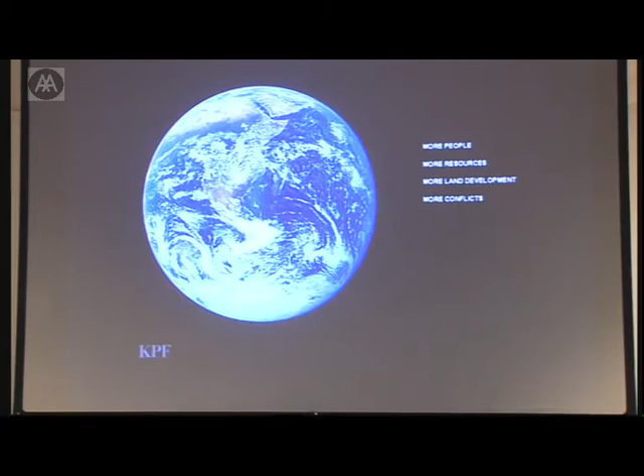Why tall buildings is maybe the first question, and that question is easily asked by people around the world, maybe more so in London. The world is getting more crowded, more resources are required, and every time you are struggling for land use, you have conflict. We have world population expansion, happening a lot more rapidly in developing countries than in Europe, but nevertheless happening here as well. More people are moving to the city, which means cities have to cope with growth of their own through either immigration or people migrating from rural areas into the city.

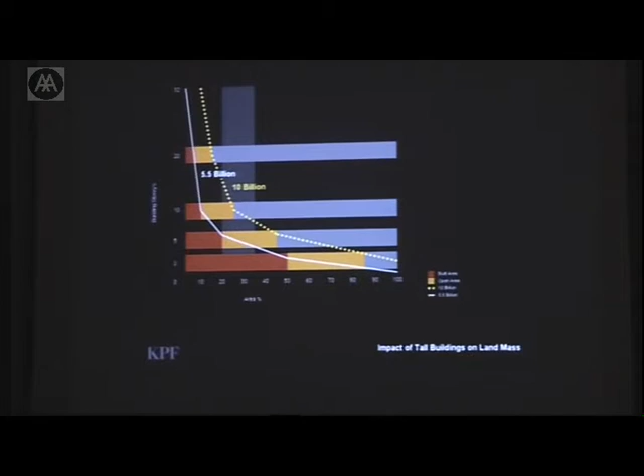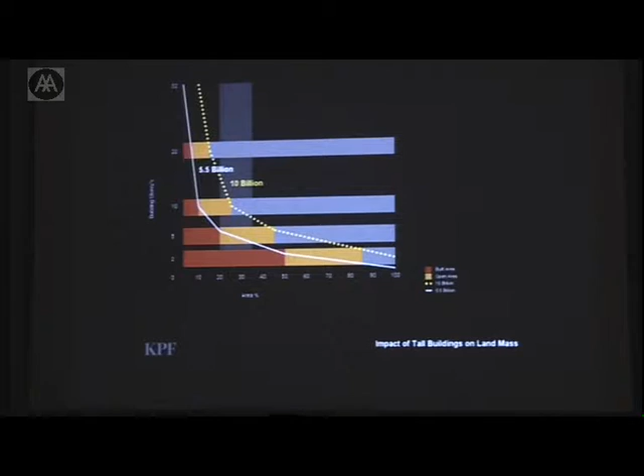When we talk about density, cities like Berlin, which has a very prescribed zoning density, are talking about building 3 to 4 times the plot area or site area, while tall buildings can range anywhere from 16 to 20, or in the case of the buildings we're doing in London, 28 times the site area ratio.

To bring us to the London context, what about doing a tall building in London, which is different than doing a tall building in another city, especially in a city in Asia, where we're building most of the tall buildings in the world today.

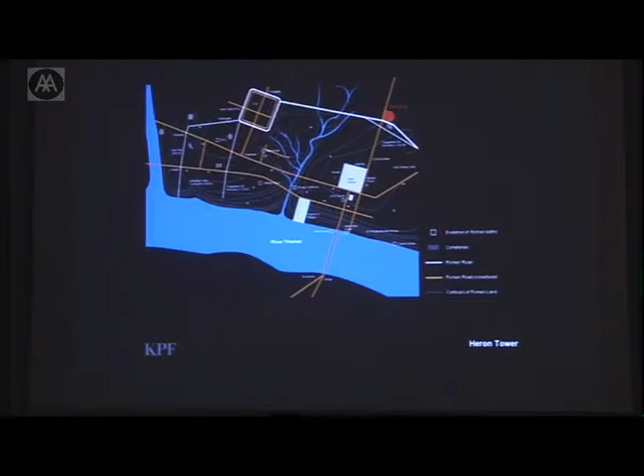Up until a couple of years ago, London's tall buildings consisted really of NatWest, now Tower 42, and it functioned as a solitaire in the city. Whether or not it deserved to be such is a different debate, but that's how it functioned.

Once the bomb created a site for Swiss Re, a second tower was built at exactly the same height, 183 meters, and you start to get a dialogue happening—they're actually quite close together within the city, and they speak to each other. All of a sudden you don't have a solitaire. Although the Gherkin is a very iconographic building, you still have this dialogue happening between the two buildings.

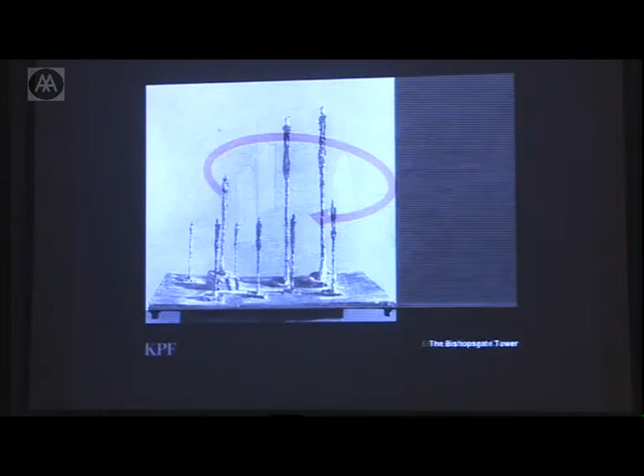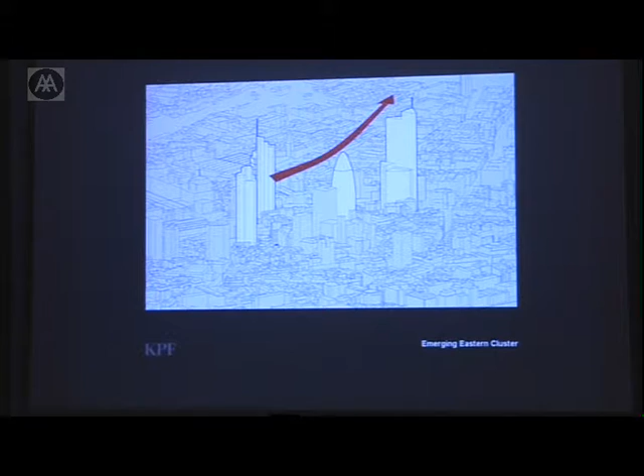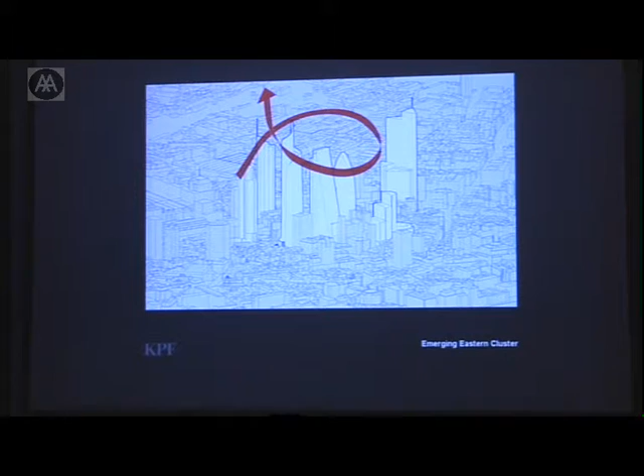So we started with that approach in mind, and the Minerva tower sort of dragged the center of gravity away. I think that's taking care of itself now, but it's probably not going to happen. Richard Rogers' building for British Land brought the tightness of the cluster back to the center, leaving a gap—which you'll see in another image more clearly—for the site we are working on. Because that was in the center, people started urging that it become the taller object.

This is the taller height. In fact, it's been reduced a little bit since this time.

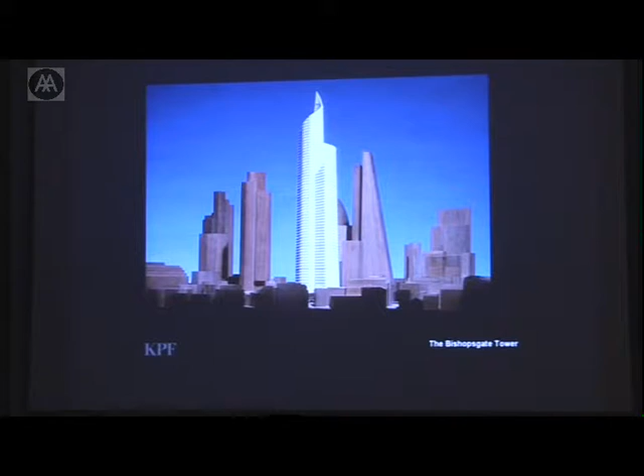It also means that you no longer have a solitaire condition, but a group of buildings which read together as a group, and not be in competition with St. Paul's, which the city planners still respect should be the monument of the city.

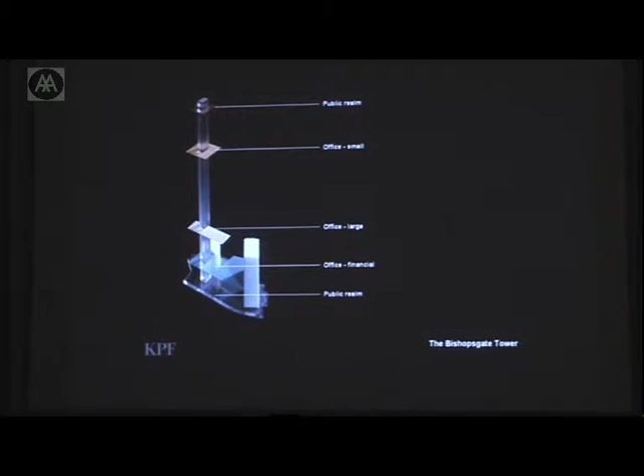The brief from the client to us was actually quite straightforward and not very prescriptive—well, or very, depending on your point of view. The public realm at the bottom of the building was a mandate, partly from the client's viewpoint, but certainly from the city's viewpoint. The client wanted large commercial floor plates at the bottom, varying to smaller ones so they could offer some variety, and also the possibility of some public realm at the top of the building.

We started studying a site which is very, very awkward in shape. It's sort of a C shape. It's not at all stable for a tall building if you build a skinny, narrow building, and it's a bit strange to build a C-shaped building.

The first form just shows what you would do if you put a lump of area on the site and extruded it upward, and the following images show exactly the same quantum of space but in different forms, because we were really stuck. The site is about 100 meters long and 20 meters wide, and how would we find a form that fit on that site, which is quite crammed in.

These show different attempts, almost systematically, without really considering form from the origin of form, but form from the origin of what we had to start working with.

What we found was that on one hand, the proximity to Richard Rogers' building was so close that it wouldn't really work to put a tall building at the southern portion of the site. We needed to push it to the north to get some kind of gap, and also to be able to see through to Swiss Re.

We tried to figure out a way to hold it up if we could make it that slender, and we also looked at dividing the floor into 2 zones because the client wanted to be able to lease to 2 different tenants per floor.

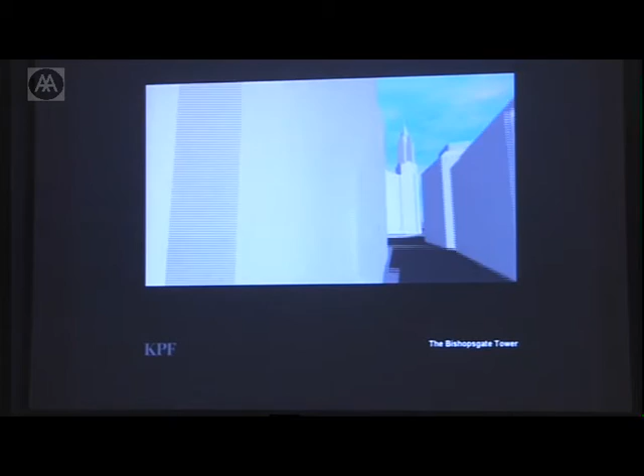We decided to make an animation because they were getting really hung up on a still image, and the one still image was only representing a fraction of the experience of the street, which is experienced in a transitory manner. And from St. Paul's, you actually see that the cluster is still quite far away and doesn't really play a role in the immediate context of St. Paul, certainly as a pedestrian within the city.

So here you see as well, perhaps more clearly, the way the top of the building is cut away to relate to other neighboring buildings. I'm going to skip the rest of this because there's another video after this one.

Okay, the building from St. Paul's. The plan of the building is very unusual for an office building. Most of our clients want a rectangle, which didn't fit on this site whatsoever. And nevertheless, we managed to get some straight zones around the sides.

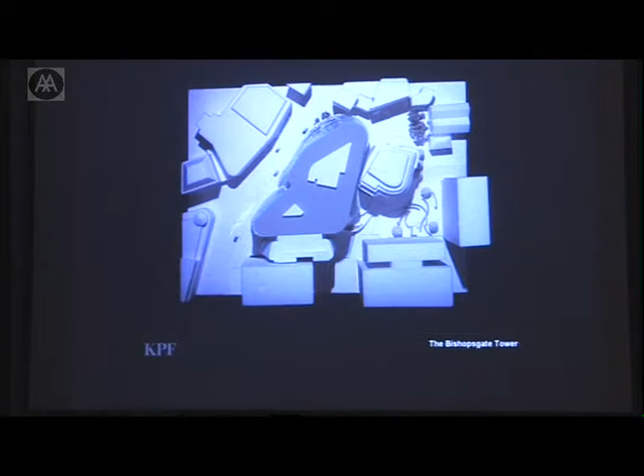It's basically a series of flat planes connected by cones at the corner which permit the building to taper. I think Lars Hesselgren might have given a lecture here about the geometry of how that works, and if you ever want to see that again, we can organize that. It's a whole other topic.

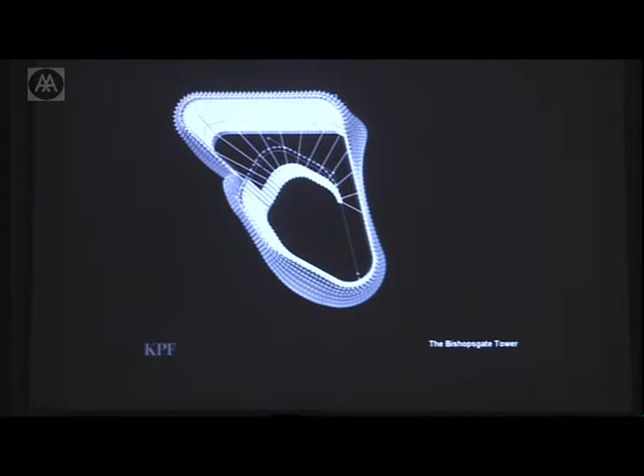We couldn't be drawing this building without the computer, but it's important to say that the design wasn't generated because of the computer. The design was generated, and then the computer is used to master the geometry, which is quite complex, because the building tapers and on some faces also is curved inward or outward, and yet you have to work with repetitive building components. If you were drawing by hand, I think no one would have the patience to sit through the whole thing.

The structure is also driven by computer optimization series, and we do have a perimeter tube structure. We started out with diagonal bracing everywhere, which is the best way to get the beams down to a smaller size, but we didn't want the architectural image of bracing everywhere like some of the other buildings. It would be too similar.

With the computer generation today, they're able to assess where you actually need the structure and where you don't, and you can start eliminating elements and just put them where you need them, and it generates unexpected patterns. From left to right, you see the progression to more of a basket weave, or as if the basket was woven and then unwoven. The columns themselves are all equidistant on any floor, but they slope upward and are independent of the movement of the cladding, which is on the office planning module.

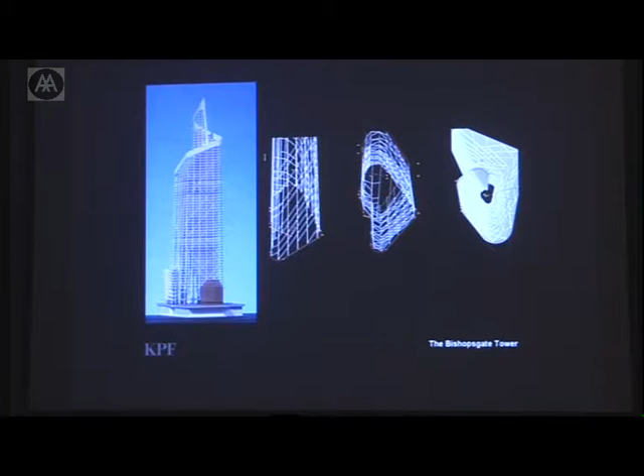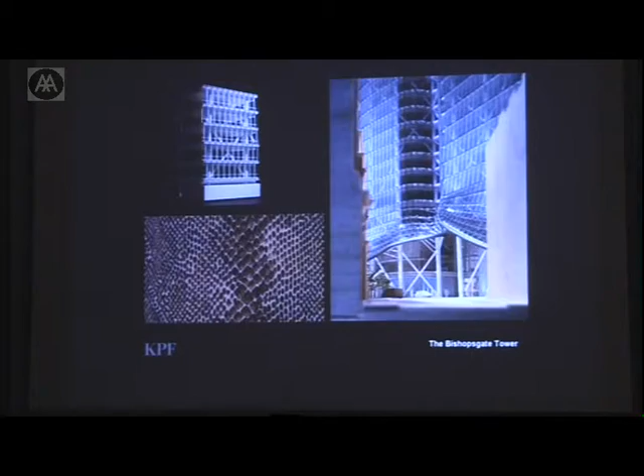The cladding that we're using on the project is a double skin, which is the best way today to meet the current energy requirements. We also made great advantage of it due to the curvilinear form of the building, because the idea of keeping flat panels but negotiating the corners was very important in making a deliberate appearance of the snakeskin.

So by going around the corner with flat panels that are overlapping, we create the texture that we want, and hopefully a sort of shimmering effect, and bring in air that is taken either directly into the office by opening the window, or back to the core to turn it into fresh air for the office floor. Those have been extensively studied with Hilson Moran to make sure that the pressures are correct on the outside of the facade. It can't be done in certain wind conditions.

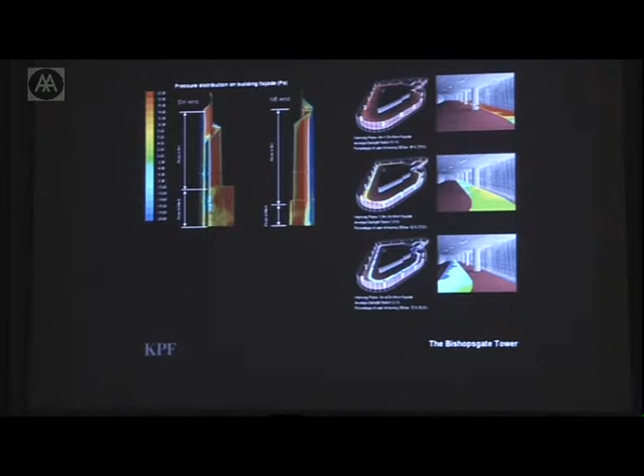Also bringing sufficient daylight into the space, which allows us to turn off the electricity supply for the lighting. It's very important in achieving the BREEAM rating, and also trying to meet the mayor's energy targets, which he's also introduced in addition to the European and British legislation, to try to reduce the carbon footprint of the building.

If we come back to the public realm for a minute, one of the examples that was referred to, not by us initially but by the people in London, as a successful urban space is Rockefeller Center. It's interesting to note that in America, if you talk to people about Rockefeller Center, they don't really know what the building looks like that's associated with it. It's the space which is important, and the things that go on there. And in the city of London, perhaps Broadgate by SOM is a very successful example of a place where people can enjoy themselves.

Nothing particularly special there, but a good space that's protected from traffic, that has sun exposure, and people can easily walk there quickly from their office at lunchtime. So what the city is hoping to achieve is connecting a series of existing spaces with new spaces that make the city a more walkable place.

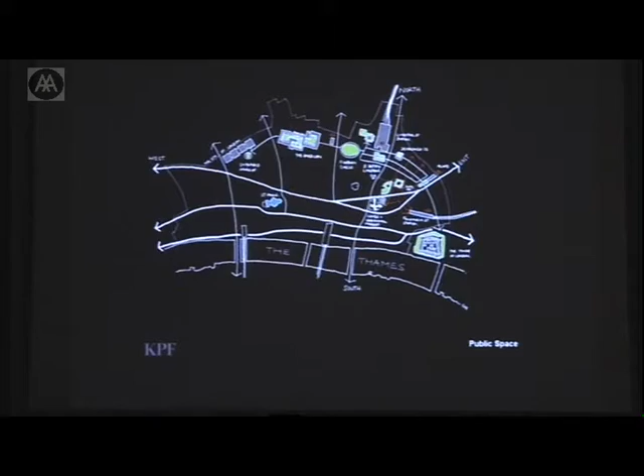And we hope that our projects can try to connect into that archipelago of spaces and reinforce the existing public spaces. It's important to go back to the idea of what a tall building can do for the city, not just on the skyline, but at the ground level.

There's a significant budget set aside for building the building, and the city has figured out that they should make the client contribute something. NatWest, when it was built, was a sort of typical 60s and 70s approach to just having a figure in a plaza.

1993 brought the IRA bomb, which made the potential to redo the building and redo the space in front of the building. And in fact, they took away the space and put it as an inside space. But in doing so, they created a more typical City of London typology of medieval street, which was not so windswept. They shoehorned in a very nice little restaurant, and it's actually functioning much better in the city than it did before.

Swiss Re, again, a very unusual typology for London, a building in the center of a square. It's not the norm in London, and that has become now, thanks to the warm summers, a very successful summer space.

The Heron Tower project is closing a street to create a pedestrian space adjacent to its site, because the site is so small, which works very well in front of the church.

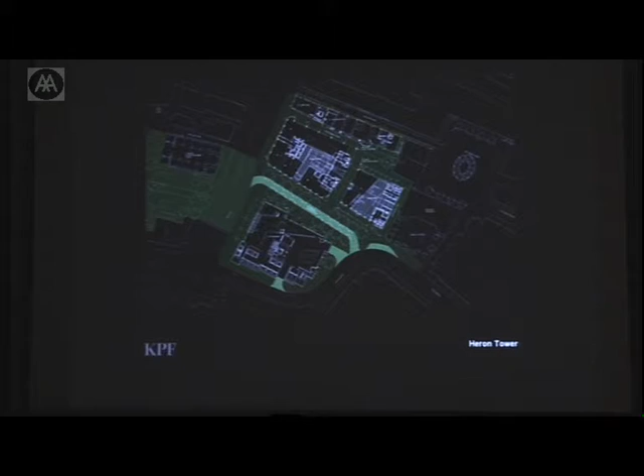Currently it's an island site with the traffic going around it, and that area is being closed and pedestrianized, which gives a frame for the church and also allows the internal public space to spill out onto that space.

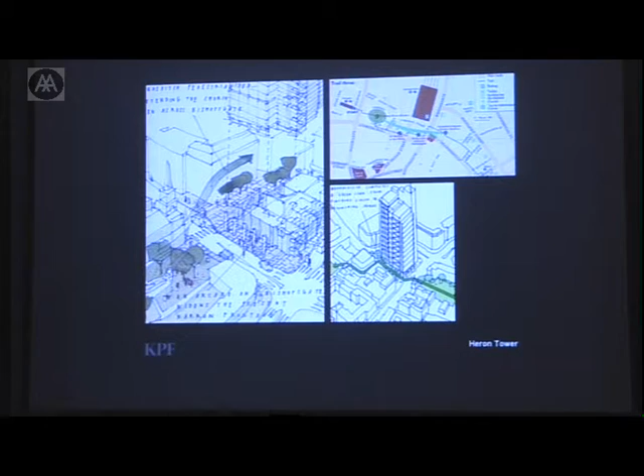And also on the upper right, you see with the idea of linking Devonshire Square with Finsbury Circus through the site, it just makes crossing that traffic island a little bit more pleasant.

There's also public space dragged up into the top of the building with a sky bar, which in a city where there aren't very many tall buildings yet, even the 37th story seems exciting.

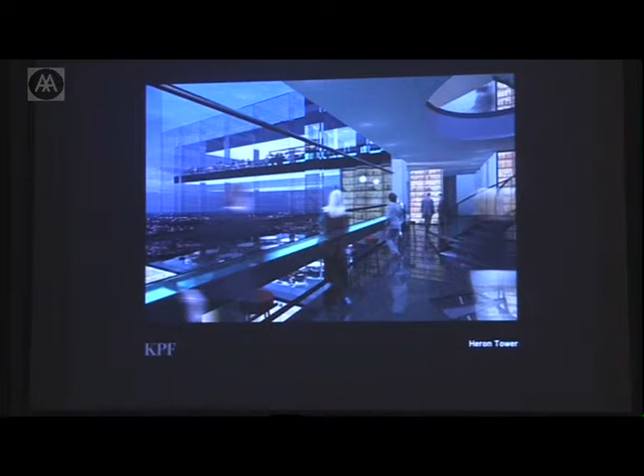And the site that we're working on for DIFA also has the potential to knit together a series of spaces which are starting to emerge.

We're going to open the site again publicly, permanently underneath the building, which will connect Bank Tube Station through Threadneedle Street, through our site, onto Swiss Re.

So you see actually very disparate spaces around the building, Bishopsgate being very busy, the plaza behind Indo-Suez House being very vast. There's a Norman churchyard.

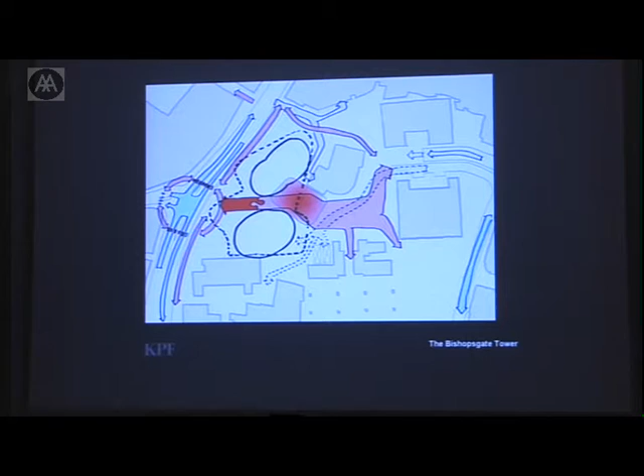That route through will start to link those together, and then each one of those spaces will have a stronger relationship to each other, we hope.

So the idea being that all of the ground level to the north of the site is accessible for public functions, and at the bottom part of the site, the darker brown level becomes the private office entrance.

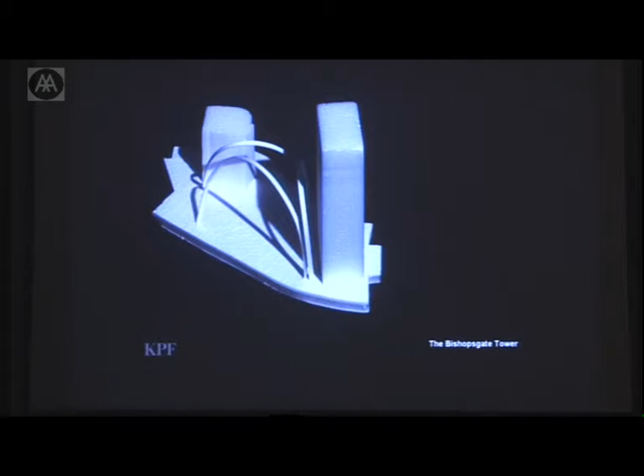We very much wanted to express the structure at the bottom of the building as part of that way through, initially partly due to the archaeology which is under the site, which prevents the superstructure from coming down.

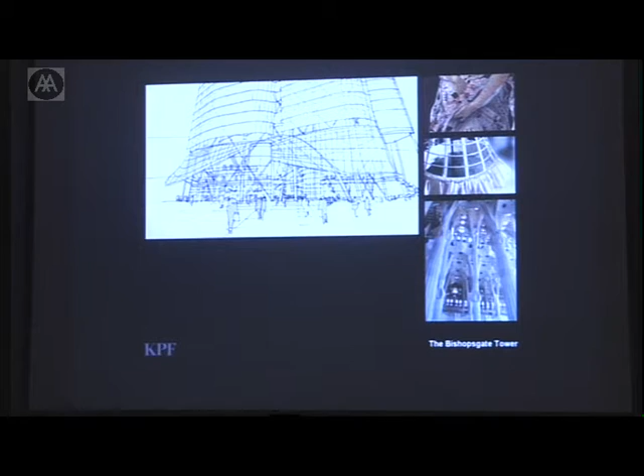And also using the skin of the building to pull away and create and mark the entry space, much like the robes of the Piero della Francesca paintings, and also creating a protective zone for people to bring the scale of the building hopefully down to a more pedestrian scale, and manipulate it, either lifting it up to mark an entrance or pulling it down to protect people from the wind.

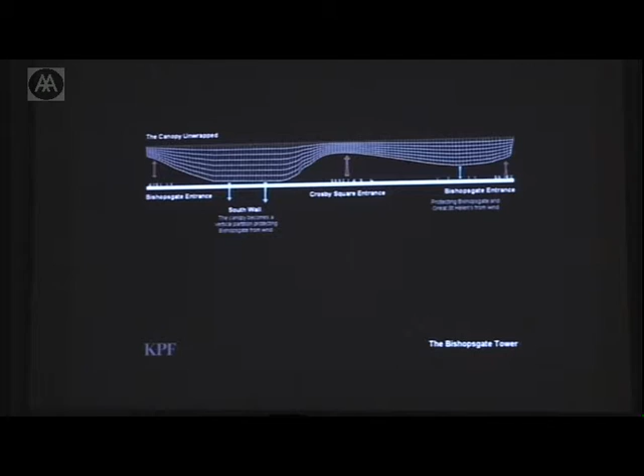And we actually went through about 80 wind tunnel tests, I think, to arrive at the particular shape at the moment, which is looking like this, and where the scales of the skin above are turned as well to control the direction of the wind.

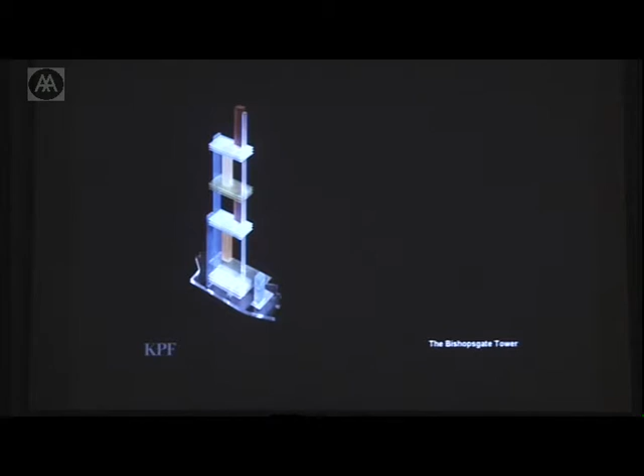That's what it looks like from the east side, and you see the route through the building to the street beyond. We were able to provide so much public space at the bottom of the building because due to a

clever lifting strategy, which is being used in other tall buildings in the world, but not yet here, which is blue representing express shuttles, which take people up to sky lobbies, and there they change to a local elevator. So all of those local elevators don't have to go to the ground.

If you have been in a tall building in New York, for example, you have banks and banks of maybe 24 or 30 elevators, and in this site there would be simply no space left for anything else. It also allows us to drag the public street of the building vertically, and make social spaces out of those transfer levels, offering either social spaces for people working in the building or publicly accessible spaces.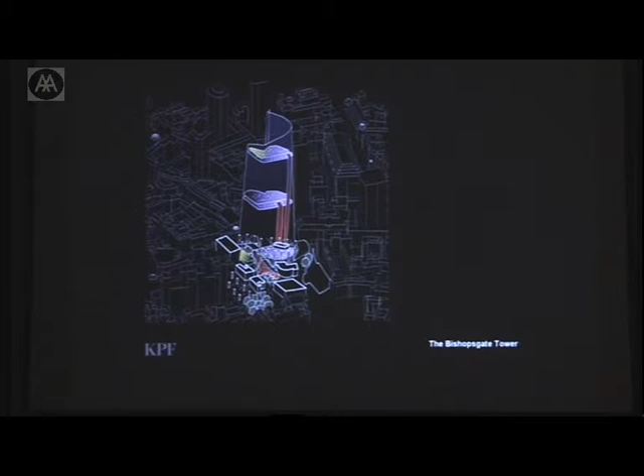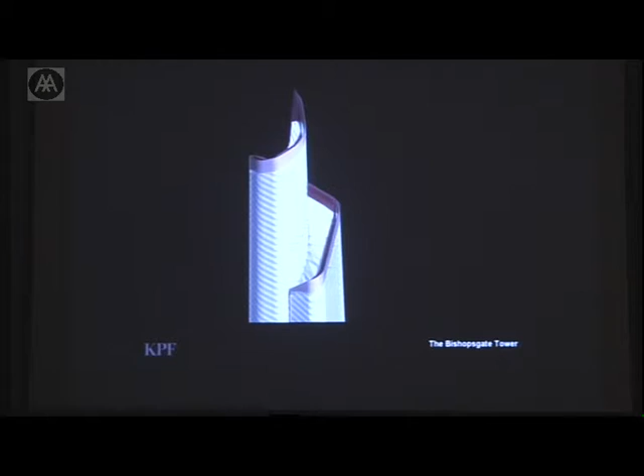And now we're moving that top one to the very top of the building, which you see here. The brown part of the building is also photovoltaic cells, which are the top cladding panels and generate enough power for the top 3 floors of the building.

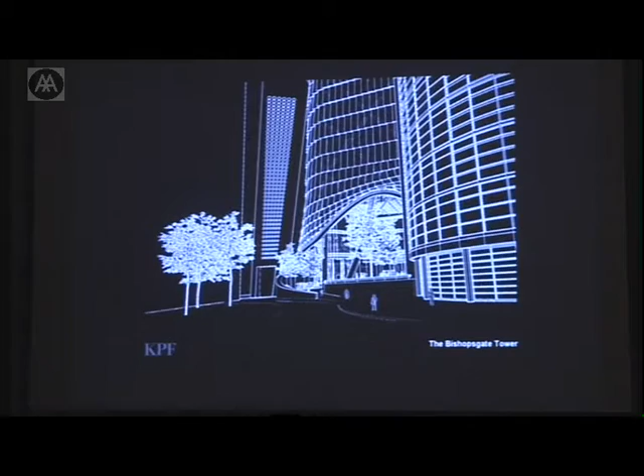One of the tools that we use the computer for as well is to generate a series of perspectives walking through the street, primarily to show the city planners and English Heritage how the building fits into the townscape role, and how, because of the type of street pattern in London, it actually looks quite different from each side. So how do you recognize it as the same building?

And this view is the latest rendering coming from Bank, and you see the route through the building underneath, as well as escalators taking you up to the express lifts, which are entered on the upper first and second floor levels.

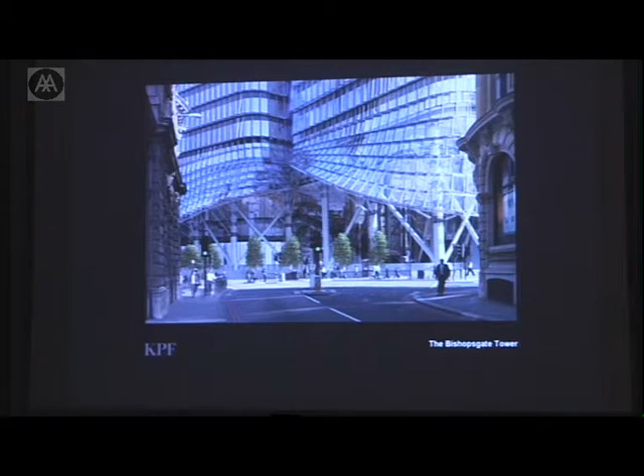So that's the Bishopsgate Tower, and I think that, yes, this is a fly-through. If I can start it.

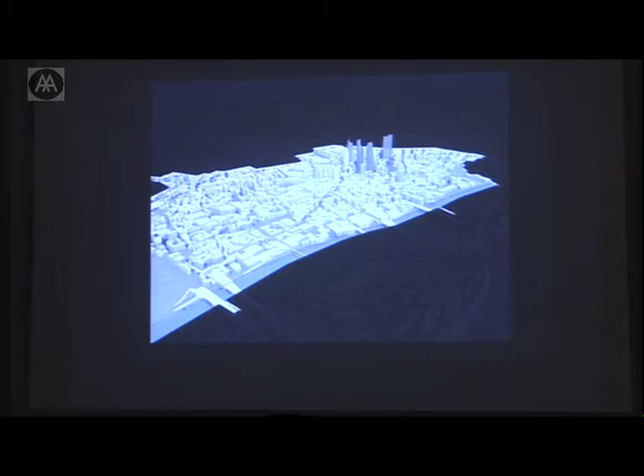So this shows the St. Paul's height restrictions, which are blanketing the city, but the cluster sort of escapes that, and that's why there's the possibility of tall buildings there at all. This is a bit slow. The square mile is represented by the brighter color.

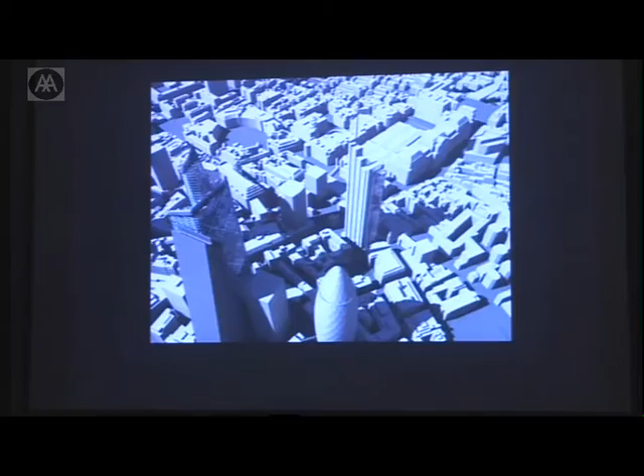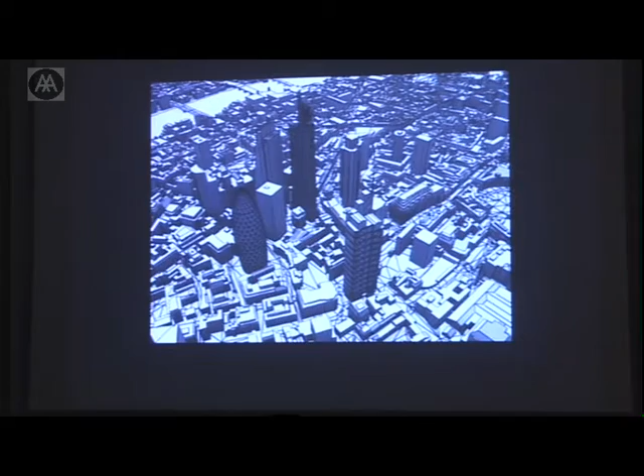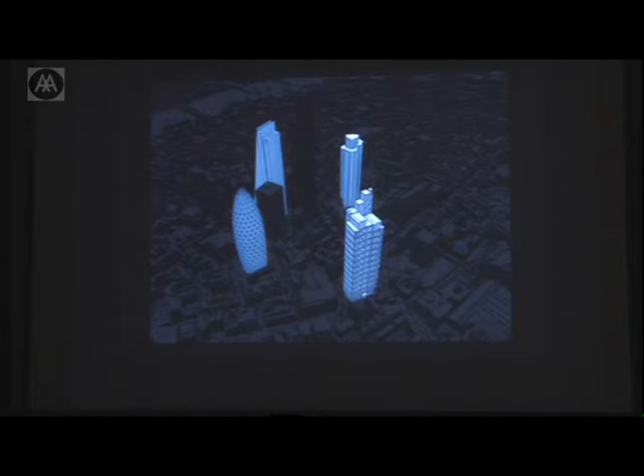I don't know if you can find where the future sites are within the cluster - again, NatWest, Swiss Re, Heron, 122 Leadenhall, and the Bishopsgate Tower. And Willis, which is actually the first one now, topped out if you have looked at the city recently. I'll just go on.

I'm going to talk to you now a little bit about La Défense as well, which is a totally different kind of urban context, or perhaps you would hesitate to call it urban in contrast to London. This building is in a similar phase as the Bishopsgate Tower project, although the contractor has been appointed. We're a little bit further along in the development of the work.

The building that we're working on was built in 1974, and it's currently reached the end of its useful life, which means the mechanical system is outdated and doesn't work very well anymore. The facade is leaking, and no one wants to be in the building because it's not very nice. The client asked us to look at what we could do to improve the quality of the building internally, as well as improve the expression of the building, which they found to be not very attractive. It's the brown building which says AXA on the top.

So it happens to be one of the buildings at La Défense, which is also quite visible from the city of Paris, and that engaged us in another debate as well. If you'll notice, the La Défense skyline at the moment is relatively, well, it's created by buildings with relatively flat tops, which I was told by the Ministry of Culture is a French phenomenon, but we tried to explain to them it was really more about the 70s.

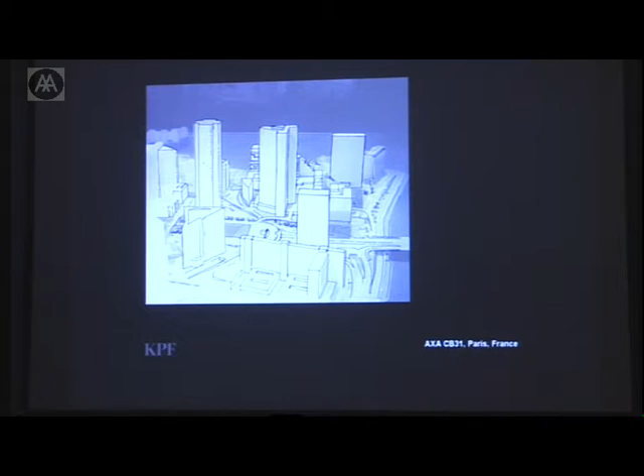This is an axonometric of the building as it exists today, and you can see that what we propose to do is start taking area away in some areas. The red on the bottom right is where we have to take area away to allow people to pass through the building, and the blue is where we could add area back to give a more dynamic character or create something happening at ground level.

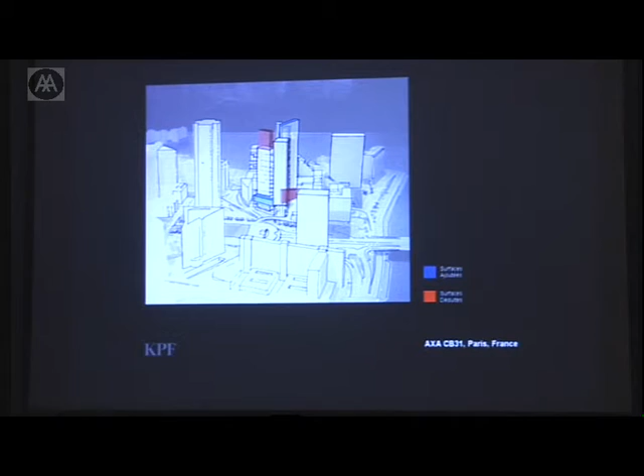Our idea about the skyline change was simple. We took each of the three wings and changed the height: one wing stayed the same, one wing went down, and one wing went up. We also changed the angle to make it more spiraling and more dynamic.

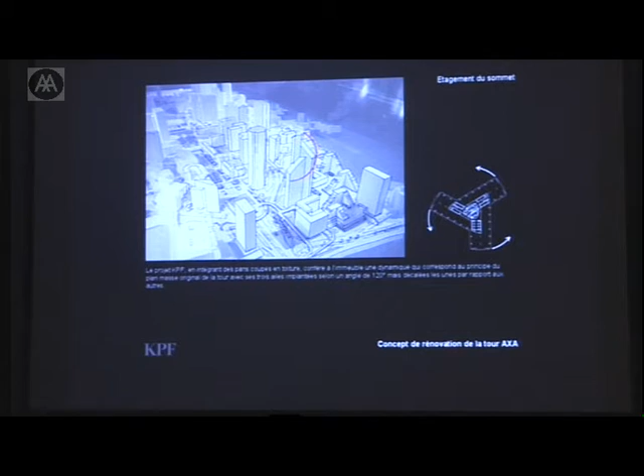We did quite a lot of work on the proposal for the interior as well, partly based on the idea that if we actually took area away from the interior, we could create more interesting spaces where people working today could have breakout spaces, meeting areas, or reception areas.

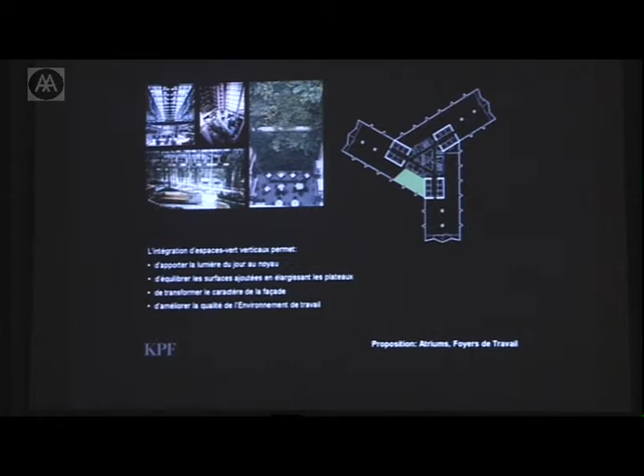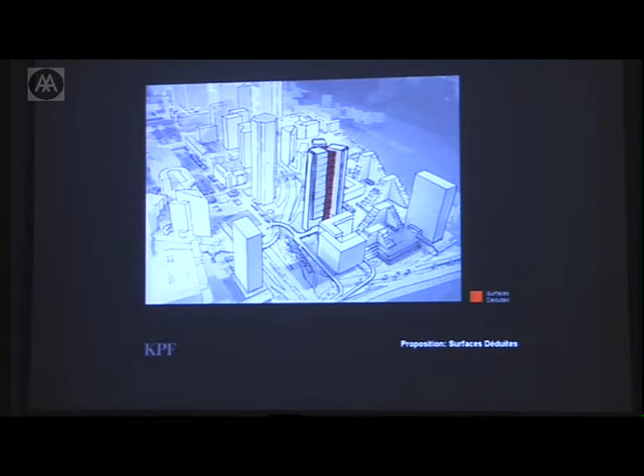These images are basically part of the building regulations we have to work with when we try to come up with an image for the cladding of the facade — it would be nice not to have them, but they're there for health and safety reasons, and for environmental reasons.

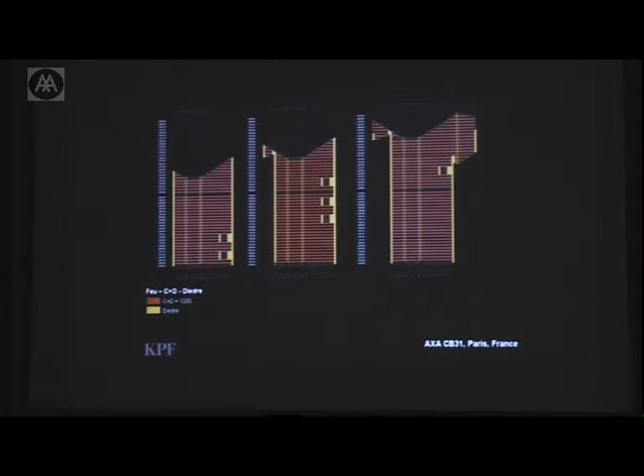This shows the fire code regulations where we have to have fire-rated zones on the facade, between floors or between wings. This shows where we need extra special acoustic protection against the highway, and where the facade has to work harder to keep the sound out so people can enjoy a quiet atmosphere to work in.

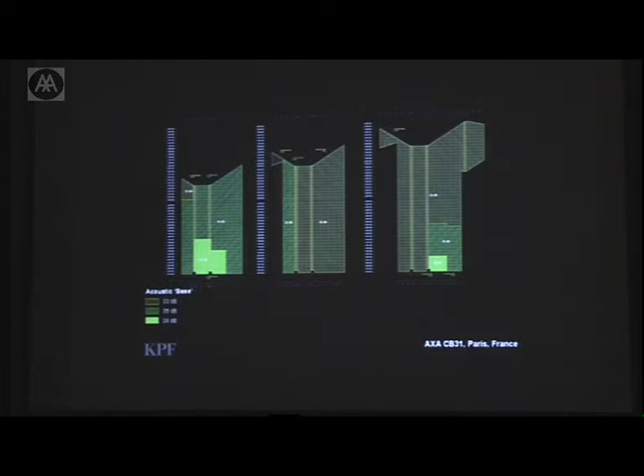We also take a look at the solar factor — meaning where the building is suffering the most from too much sun exposure in the summer season versus the winter season, which are different because of the different angle of the sun.

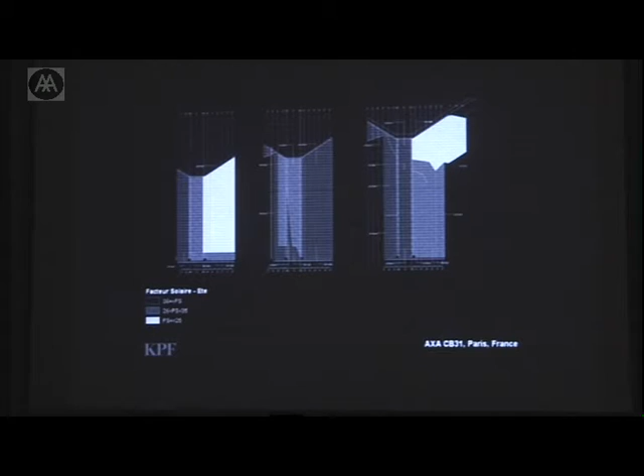We try to respond to that in coming up with a strategy for how we would put a skin on the building. Because the building is so wide, we really wanted to break up the volume by putting the protective shield only where it was really needed, and using it to create an image for the building at the same time. So we wrapped it around the building and cut it away where it wasn't needed, and the shadow outline you see here is where the skin of the bouclier, or shield, is placed.

So the building today looks like that, and our proposal is that it would change quite a lot with the different heights and the different skins. Here's a bit closer, and again from the other side. Our intention is that it doesn't look exactly the same from each side, but it's still obviously the same building — we play with the composition to try to break down the gigantic form of the building and give it some movement as well.

So we think that in changing the form, we've become a little bit truer to the original concept of the pinwheel. From a distance, it's more legible as a pinwheel. I'll come back to the public realm in a bit.

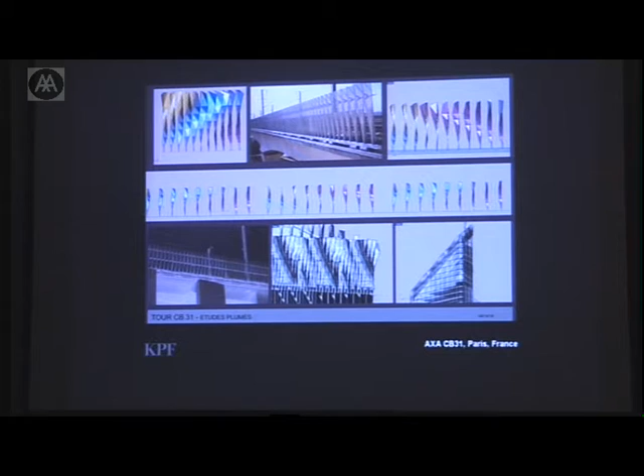These represent more exploratory, decorative aspects of our work, where the skin of the building goes past the roof, creating a crown on the building. We're simply taking the folded metal skin of the building and pulling it past the roof. It needs to be perforated to allow wind to pass through, and it needs to be easy to build and inexpensive.

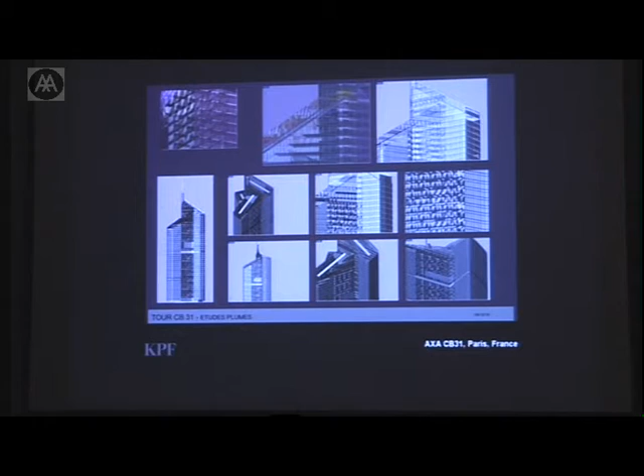So we're looking at folded metal sheets, and we take that effect of the folded metal sheet right down the face of the building, which gives it a bit more dynamic reading, and exaggerates the difference between the smooth skin of the bouclier and the more textured skin of the folded metal panels. Some attempts to figure out how that will actually work, and we're still exploring those aspects.

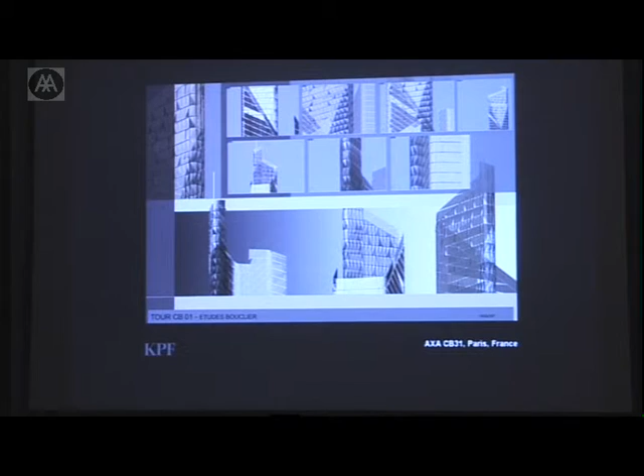And then at the very tip of the building, where we're protecting some electro-generator shaft ventilation, we try to create a crowning effect and pull the height of the building up in a more elongated way.

So if we go back to the base of the building, we're doing something totally different than what we're doing at the top of the building, and there's a totally different design problem. As I said, the pinwheel shape doesn't integrate very well into the orthogonal context around the building.

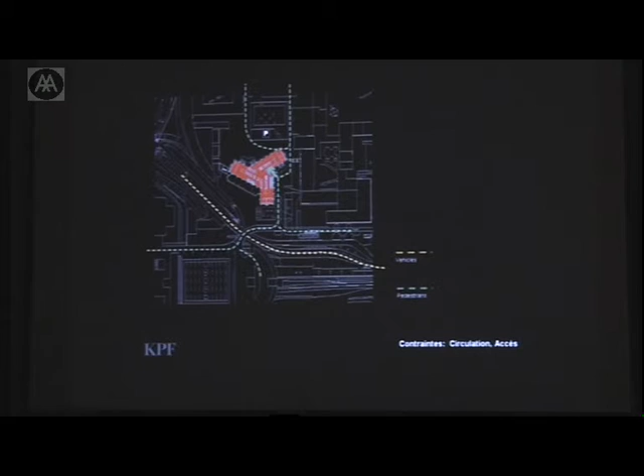The local authority obliged us to punch away part of the base of the building to allow a wider passageway through it. This is the current condition around the building. I suppose you could say it achieved maybe somebody's original intention with the greenery and the cars on another level and the pedestrians on their own level, but the building itself doesn't really engage with the public realm at all.

So our proposal, if the existing building is on the left, was to bring some of the public or social functions which exist today in the base of the building, in the basement levels, up to the ground level, which meant cutting through some slabs and rebuilding some parts.

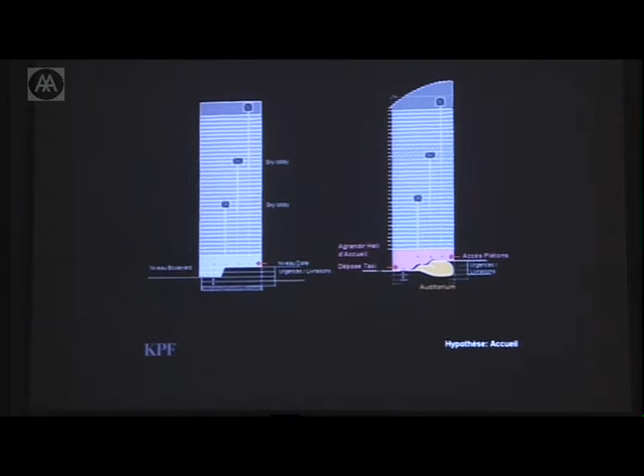And that allows us to use those small volumes to create a better urban form, as well as a more penetrable, permeable, accessible building. That was the idea of the gardens as well.

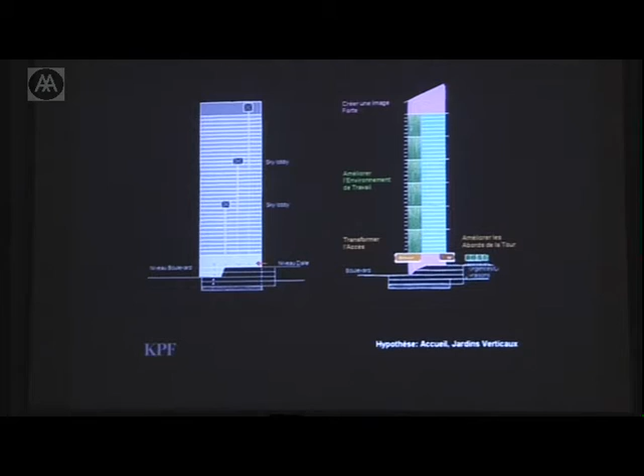This is a section through the building showing that we would bring people in at both levels, not just the upper level, and open up that lobby so it was quite large, with the lobby even visible from the bridge at the side.

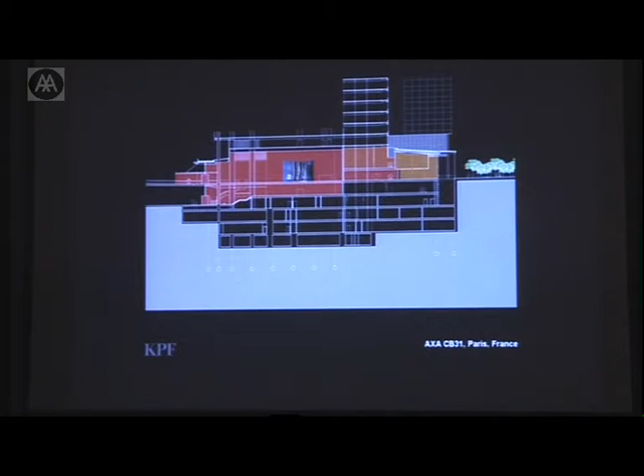The eating space at the back would also be accessible, and in fact there are eating spaces all around the building, with seats for 4,000 people. The space to the north is a restaurant which the public could share. These show the explorations of that form wrapping around the building, essentially a building in its own right, creating scale accessible to the public.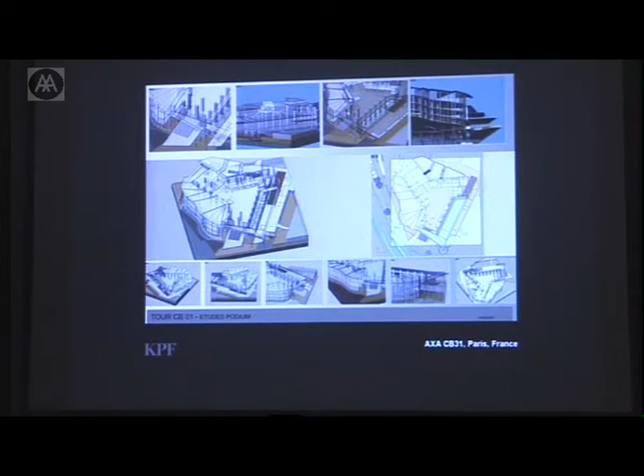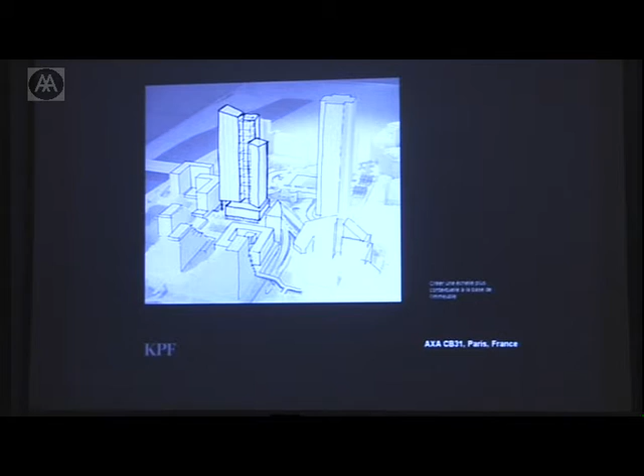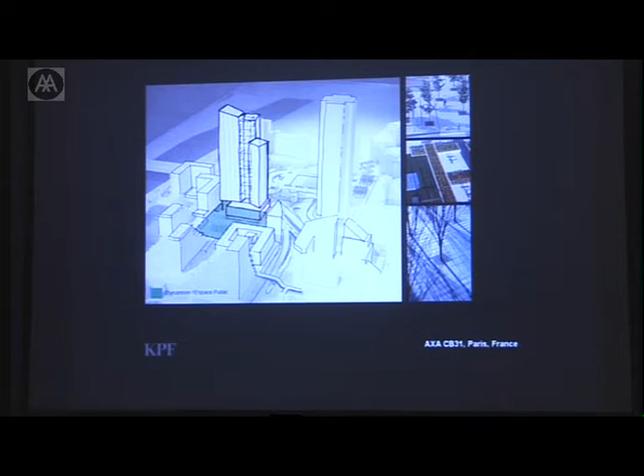This shows the existing condition to the north on that plaza, and the idea of creating a volume at the bottom which brings the scale down and creates an orthogonal shape so it feels like it fits in, with the eventual idea that they could use money from the tax on the extra space to redo that square.

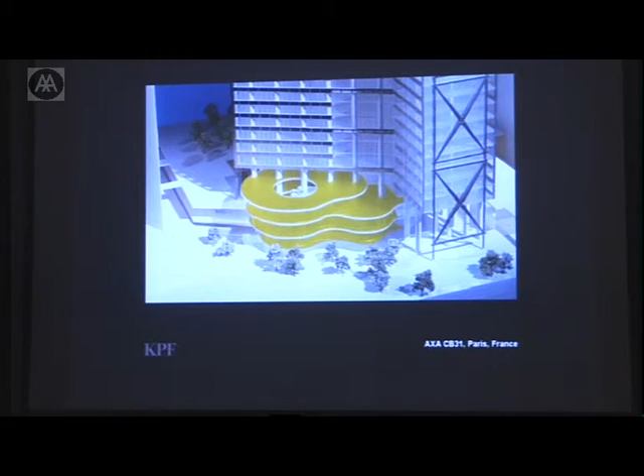The form on the south side of the building, facing the boulevard, the highway, could be more dynamic and more of its own shape rather than trying to blend in, since there isn't a context of buildings there, while the building on the north side is more of a discrete volume. This shows trying to bring activity into the base of the building.

What we have today, on the right-hand side, is an outdoor space under a flat roof announcing the arrival. We're building a new, much wider bridge to create a new entrance for the building and a more appropriately scaled route to the other spaces.

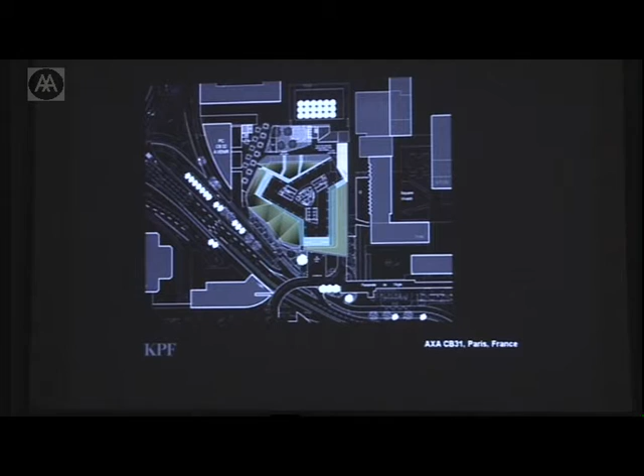The pavilion to the north is broken in height, but not in elevation, again trying to break down the scale to a pedestrian scale. And the volume on the south side is still fluid, but not round as it was before. So that's where we might be heading, and that's taking us back out.